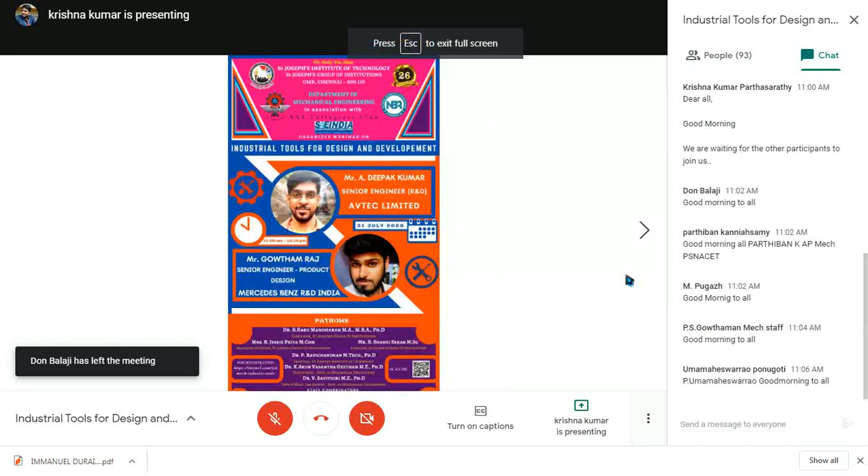Your continuous support makes us showcase a different set of intellectual webinars that can definitely serve the hunger of your brain. Our St. Joseph's Group of Institutions has amplified and grown in many folds over 25 years and successfully crossed a silver jubilee, and we are now into its 26th year.

I strongly believe growth is not only a vertical dimension, it is also a horizontal phenomenon. So when growth happens, inclusiveness must happen.

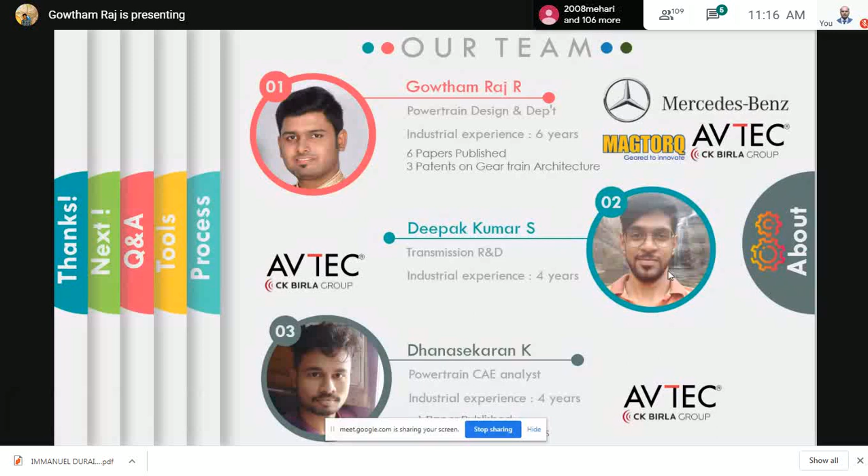Thank you, Deepak. So let's begin this agenda. Before I begin, let this webinar session be more of an interactive phase. Whenever you have any doubts at any phase of this webinar, please feel free to pause us at any point, and we will have a debate on that, and we can move forward.

Or else we will be having a separate Q&A session at the end of this presentation, and we can discuss there also. You can post questions over the chat also, and we will be taking those up at a later point. A few of the questions may not be answerable at this moment, but surely we'll be taking up those questions and reaching you in person.

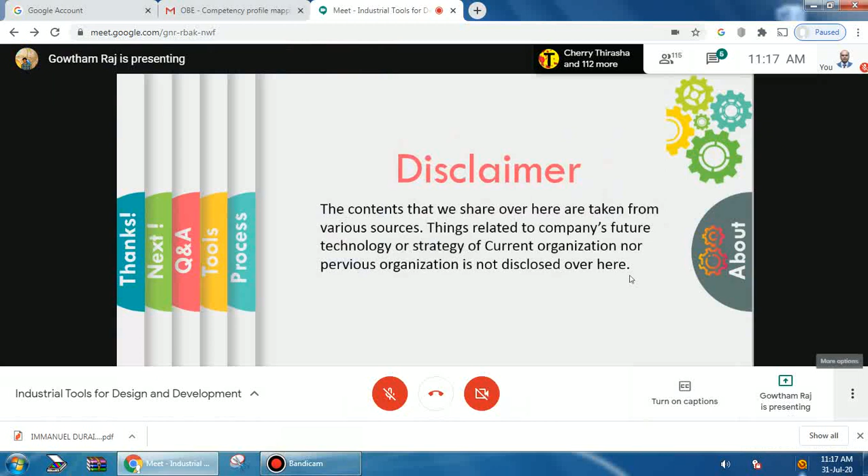About this disclaimer - the contents that we share over here are taken from various internet sources, and things related to our company's future, technology, or strategy of either our current organization or my previous organization are not disclosed here.

So we'll go to the vision of our team. We, the team Academic to Industry, are a group of young engineers under the umbrella of an experienced professional. Our aim is to help you, as a student, understand what is expected by the industry and give you a glimpse of what is happening in the industry.

In this regard, we would like to equip young engineers with the basic technological tools which we use on a day-to-day basis in most of our fields. Whether you want to pursue your career as a mechanical design engineer, a CAD engineer, a CAE engineer, or a production engineer, the industrial tools we discuss in the upcoming slides will be useful in one way or another.

The reason we started this Academic to Industry group is that when we joined as GETs in our organizations, we didn't know about these tools, while a few of my seniors who had that opportunity used it to succeed much faster than others. So we thought we would bring what is happening in the industry to the academic people. In simple words, we are trying to bridge the gap between industry expectations and young academic engineers' skills.

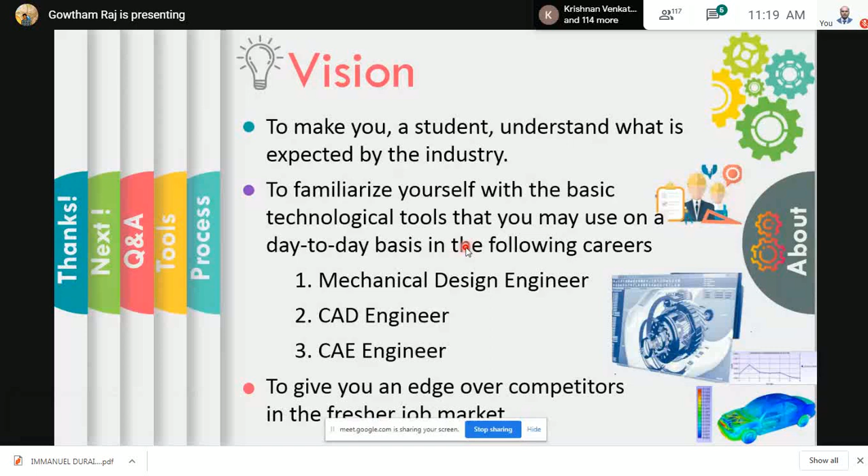We will move on to this topic. In this slide I will be explaining, or taking you through, what the industry expects, and as young academic engineers, what skills you should possess. Now let's take a look at this.

A person passing out of college will be having a bachelor's degree in the mechanical discipline, with or without specialization in automobile or production fields. The good thing is the practical and theoretical knowledge you possess over these four years - the strong theoretical background and the lab work - adds a plus point, provided you have done your final project on your own.

Nowadays most colleges are encouraging their students to participate in real-time events like Baja and Supra. I even saw the video where Mr. Krishna Kumar showed tractor events, and I was really surprised. These things make students realize that whatever they have learned in theory can be implemented in these practical sessions, and this adds a good portfolio for them.

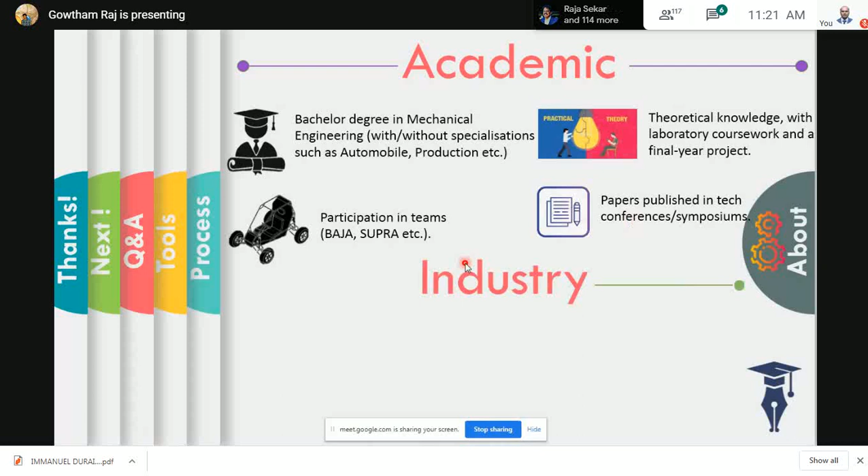Now let's look at what the industry is expecting from you guys. Whenever we talk about industry, the term 'industry ready engineer' is becoming more and more common. As an engineer, whenever you enter an organization, you will be in a GET role - Graduate Engineer Trainee.

Whenever we say industry ready engineer, the industry expects whoever joins as a GET to work on their day-to-day projects with minimal training. I remember my seniors from 2010 telling me that when they passed out of their curriculum, they used to have an exclusive one year of training as a GET, followed by six months of specific training in the departments they went into.

But now, because of industry changes, and because of time, money, and resource optimization factors, everything has changed. Now the person entering as a GET is expected by the industry to become part of the team within two or three months, with the basic tools that are used in the industry.

Last but not least, about strong basics - I have been part of R&D for the past 6 years, and whatever problems we face are all related to the basics of engineering, whether thermodynamics, strength of materials, or machine elements. These basics will always be helpful when you enter the industry.

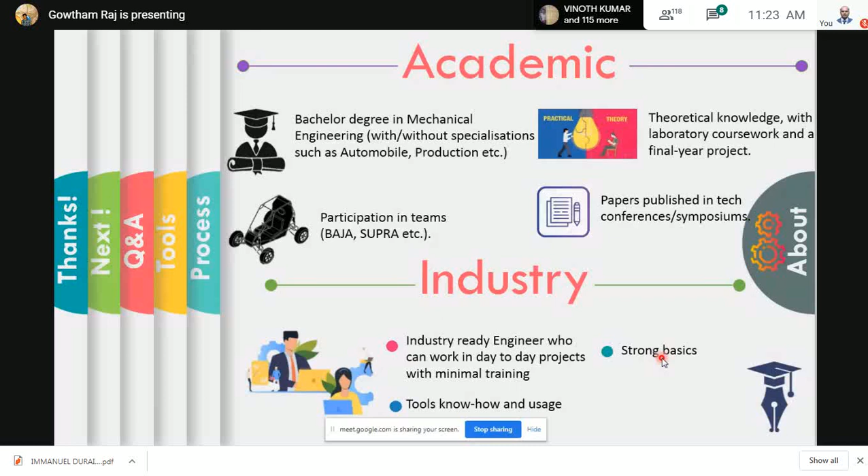Next I will take you through this product development cycle. This is what almost all industries follow, not pertaining to one industry but common across all of them, whether it's the energy sector, marine sector, windmill sector, or automobile. This product development cycle is one among the same, with some modifications pertaining to their own industries. Let's have a glimpse of this.

Everything starts with business planning. There is someone called a business analyst working in this business planning team. The role of the business analyst is to predict how the market is, how the scenarios will change down the line, 5 years, 10 years, or 20 years into the future.

This business analyst will come up with a proposal of how our product portfolio should be over time. I remember when I joined as an engineer in AVTEC Limited, one of the business analysts came with a proposal of electric powertrain for dump truck vehicles.

When I say dump truck vehicles, these are used in off-highway industries, not similar to what we see on normal roadways. Their payload, their load capacity, is more than 100 to 200 tons.

When the business analyst comes up with a proposal, he has a discussion with the product planning team. This team stays in touch with business planning and comes out with something called specifications, meaning whatever product we produce in the industry should meet some expectations.

Let's take the example of a truck. Whichever truck, based on its application, either in the mining industry or in on-highway vehicles, has its own specification. The truck in the mining industry will require more torque than one on normal highway roads.

In those conditions, they derive all the specifications of whether my truck has to carry so much load, with so much torque, and at so much speed. All these specifications are derived at this phase.

Once this is done, there is something called the business case team, made up of top-level managers sitting across and discussing cost benefits and the rate of returns that it will create for the industry, along with future plans for the next 5 to 10 years and what the revenues will be.

Once they feel everything is fine, they form separate teams across the organization, from the production team to the R&D team to the manufacturing team to the quality team. There will be a separate dedicated team working on these projects.

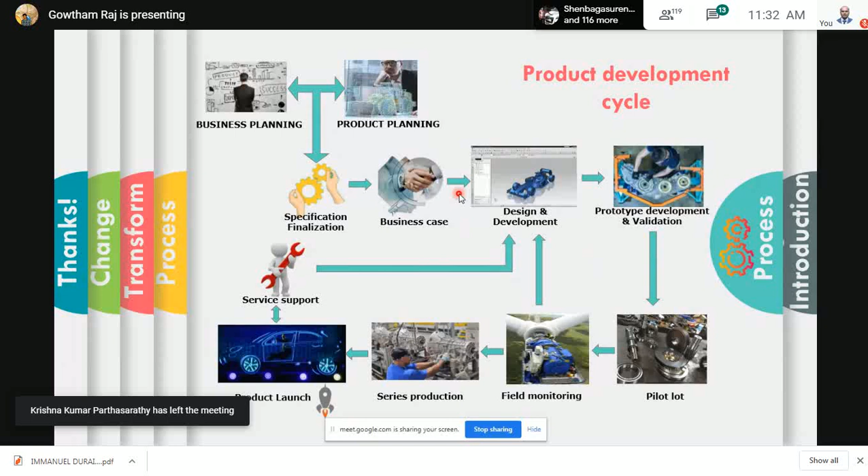Next, let's move on to the design and development cycle. The reason we have brought this design and development cycle exclusively here is that whenever you guys as a GET enter into any of the industries, you will be placed either in the design team, the development team, or the quality team.

Major of these teams are where you will be working, so it's highly necessary for you to understand what is happening in these teams. I have taken an automobile, a car, as an example, and described the various stages as they happen. As I mentioned in the last slide, from the business case, once the specifications are finalized, it moves to the research and development team, or the design and development team. Whenever the specifications are finalized and move to the R&D team, a separate team will be working on this particular cycle, right from concept layout.

Whenever I say it goes to the concept layout, there will be a parallel team working on the calculation base. Specifications come in two kinds: size parameters and functional parameters. There will be a separate team working on the size parameters of the car, and a separate team working on the calculation, whether it has to reach so much gradability or so much speed. All those things will be looked after by the calculation team.

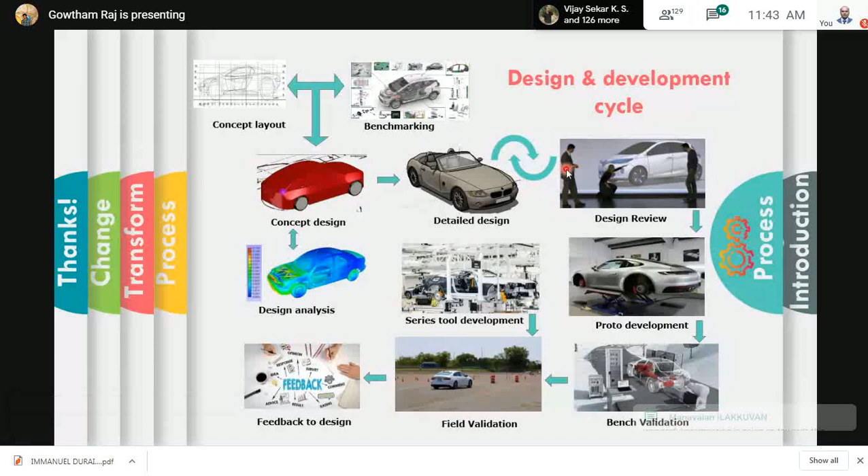So we will be seeing what are all the tools that are going to be used in these phases in the upcoming slides. As a basics, these are the five major tools that we use as design in powertrain-based industries: Romax, Nastran, KISSsoft, KISSsys, and NX-CAD.

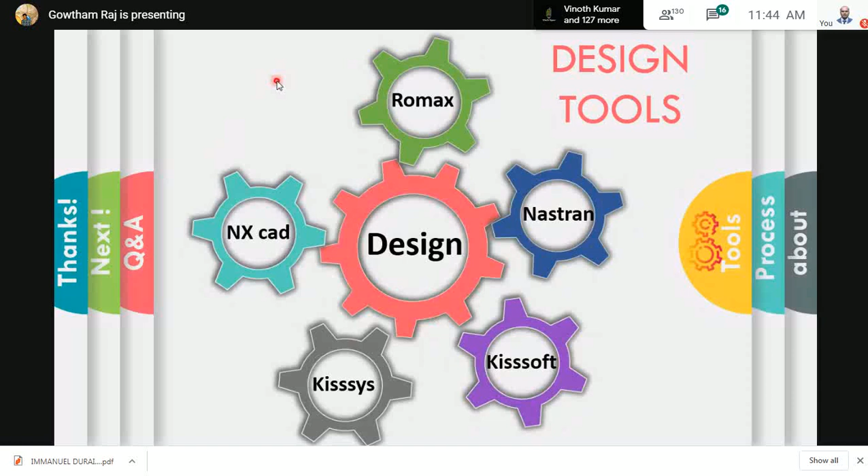And more or less, along with this, there are other two tools for hydraulic simulations: CFD and AMESim. We have not mentioned them here, but those tools are also part of these design activities. I will hand over this session to Deepak Kumar to explain these tools and give a brief introduction. Over to you, Deepak.

Thank you, Gautam. As all of you would have seen, Gautam gave us a brief insight on the design and development process and the product development process. So we will start with the first tool, which is KISSsys.

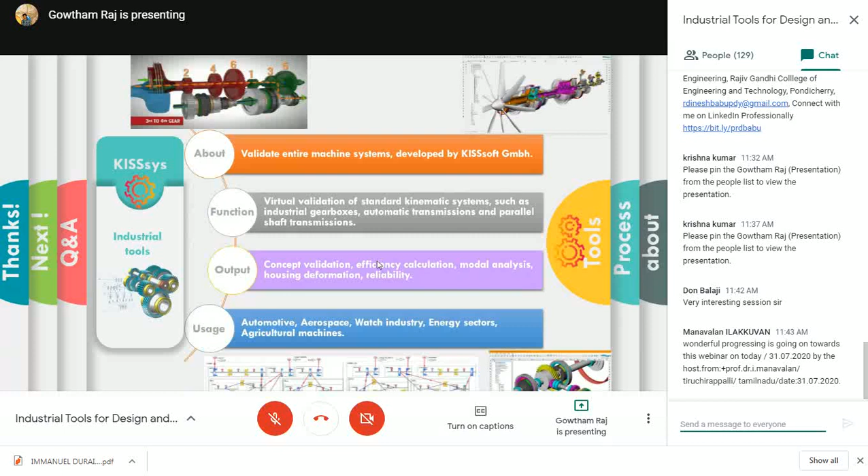KISSsys is, in layman terms, a system level analysis and design validation software. So how you start is you can model a kinematic system to simulate power flow and its behavior as a result of your boundary conditions.

So you can see the images on the bottom of the slide. There are three images. The first two depict a few blocks and connections in terms of lines. So when you start with KISSsys, you are presented with a blank canvas, and you can add your machine elements there.

In the first image at the bottom, you can see there are two blue blocks and two yellow blocks, and the same is repeated in each block within. These are connected by lines, which are otherwise called connections.

So what this typically means is, say you want to model a gearbox in KISSsys. If you see the first image on top, there's an animation - you take this example of two parallel shafts with a set of gears and their mating gears on both shafts. You just pull the component called bearing or a component called gear and place it on the canvas in a straight line, and define a single shaft and the other shaft.

Then you connect each other - for example, you connect gear number 2 to the mating gear down there, and gear number 4 to the mating gear and vice versa. Once you do this, you then give boundary conditions.

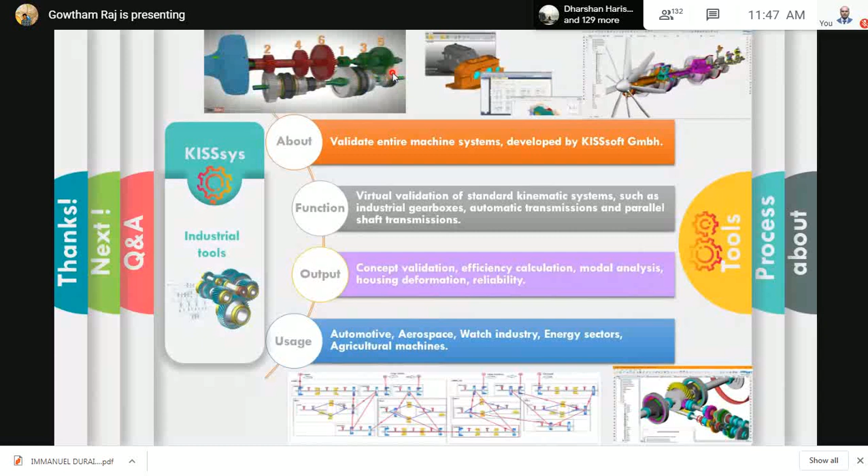This repeats for the next ranges. However, as you go up, you want more speed but less torque. So for each range you can give your boundary conditions and then determine what will be the output from the output shaft. This you can model as a system in KISSsys.

One good advantage with KISSsys is it can interface with something called KISSsoft.

So, which you'll see in the next slide. So KISSsoft is generally used for designing machine elements.

If you want to design a gear in your KISSsys simulation, you put a block called gear and seamlessly go to KISSsoft, design the gear there, then get back to KISSsys and continue with your simulation. If you otherwise have a hand calculation, you would probably have to input everything manually into KISSsys and then verify. But since both are interfaced, it is very seamless and the overall time is reduced.

This software is typically used in industries such as automotive, aerospace, watch industries, energy sectors, and agricultural machines. So basically, wherever machine elements are required, there you use KISS.

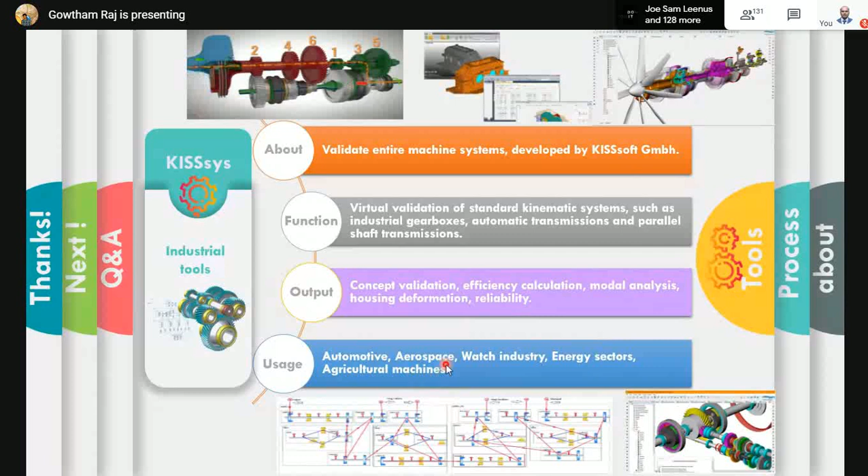Next slide, please. So this is KISSsoft. KISSsoft is used to design machine elements. Machine elements can be gears, shafts, bearings, splines, joints, and the other things which you see on the screen.

So it is like a formula-filled Excel sheet, but it has a graphical interface in the front. In the background, formulae and design factors considered in international standards such as ISO, DIN, and AGMA are incorporated. So whenever you run your calculations, rest assured that it is running on international standards from all over the world. This KISSsoft is owned by a company called Gleason Corporation.

Those of you familiar with gears might know that Gleason is the market leader in gear manufacturing. In KISSsoft, to give you a better example, I would take a gear pair.

So you start off with something called rough sizing. The rough sizing is where you give the general sizes of the gear, say its outer diameter and inner diameter, the face width, the width of the gear, and then you go to fine sizing.

Fine sizing is where you have probably verified the rough sized gear in KISSsys, so your design requirements are being met. Then you come to fine sizing, where you finalize your design, you refine it. So you give values such as the tolerances for the gears, the surface finishes, and the corrections for lead or geometry.

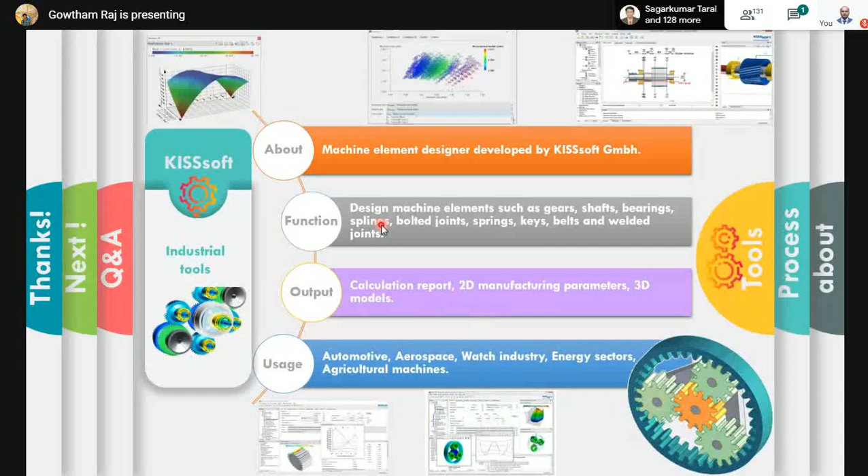That will be pretty good in the KISSsoft environment. Yeah, Deepak, over to you.

As Gautam rightly said, we could have a good idea as to how KISSsoft and KISSsys aid in the design process. The main intention is to reduce time and reduce errors, because as a human being you're always prone to errors, but software will typically run without any errors. So that's what the advantages are.

So next will be NX CAD. As the name suggests, NX is a CAD tool. It is used to visualize your designs, refine them, and convert them to a manufactured product. I would not go into detail as to what a CAD tool is, but I would want to say how NX is differentiated from the other players in the industry. The first reason is it has a model based approach.

In other tools, you would probably start with a sketch, go directly into drafting, and give the front view, left side view, right side view, and end with the manufacturer drawing. There, a layman would not be able to visualize the product to have a better idea as to how it fits your design requirement.

But with NX, you start with a model. You make a 3D model, then based on the 3D model, you draft. So your model and drawing are always connected. Even if you want to change your part, you first do it in the model. You can't directly change the drawing. You change the part, modify your 3D model, and since both are connected, it automatically updates in the drawing.

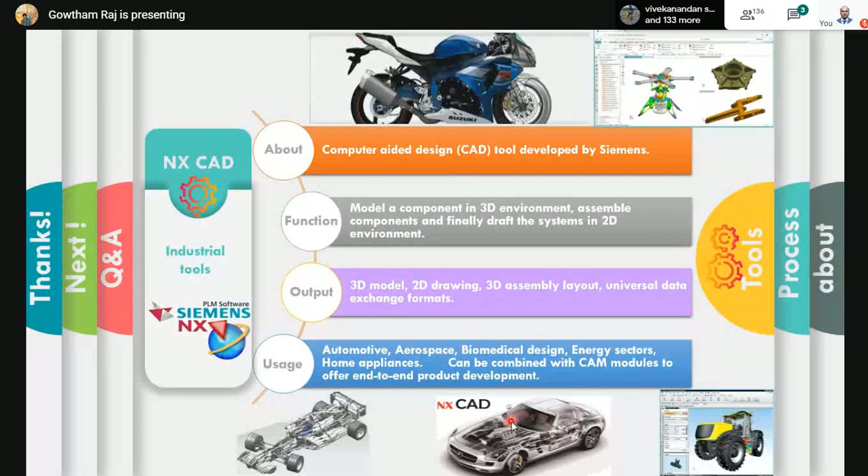So the next probably would be NX Nastran. NX Nastran is another one of those FEA tools available in the market. Again, I would not go into detail about what an FEA tool is. I would just want to say how it is different from the others in the field.

I would like to show the advantage of using Nastran over others in the form of a real life scenario which happened in Avtech. We had to design a gearbox for the yawing of a wind turbine. Many people would have seen a wind turbine, very famous in the southern part of Tamil Nadu, particularly in Nagarkoil and districts surrounding it.

If you have seen, there will be a long stem on which the turbine will be mounted. The blades rotate when the wind hits them at a specific angle. Letting apart the aerodynamic aspect of it, the wind direction changes - it's not constant, it changes as the weather changes. So you would want the turbine to automatically rotate to match the wind direction, so that you get maximum output out of it.

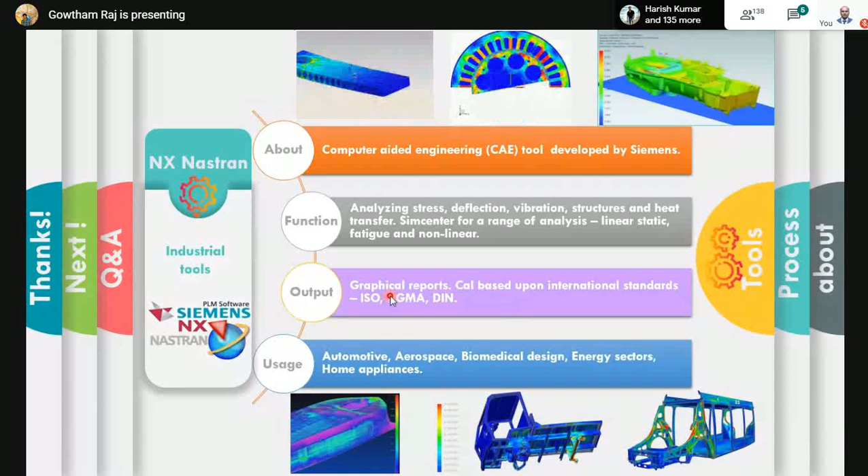We started with the concept in NX CAD, and when we wanted to validate in NX Nastran, there is a defining feature of Nastran and NX in terms of FEA. When you bring the model into NX Nastran, you would want to mesh the components first.

Once you mesh it, you will probably face some difficulties as to where the mesh is not correctly connected. So you would want to modify the part so that meshing can be accommodated.

Here, Nastran, since it's part of NX, you can, without switching back to another software, within Nastran, get back to NX CAD, make the changes, and come back to Nastran. Once you do the change, in Nastran it's just a click of the mouse to update the part.

I'll give another example: if you use ANSYS and SolidWorks, you would want to find corrections in ANSYS, do it in SolidWorks, get it back to ANSYS, mesh it again, and then validate. But in Nastran, steps 2, 3, and 4 are avoided. You just go to NX within Nastran, change the parameters, get back to Nastran, click, and your model gets updated, and the mesh also gets accommodated.

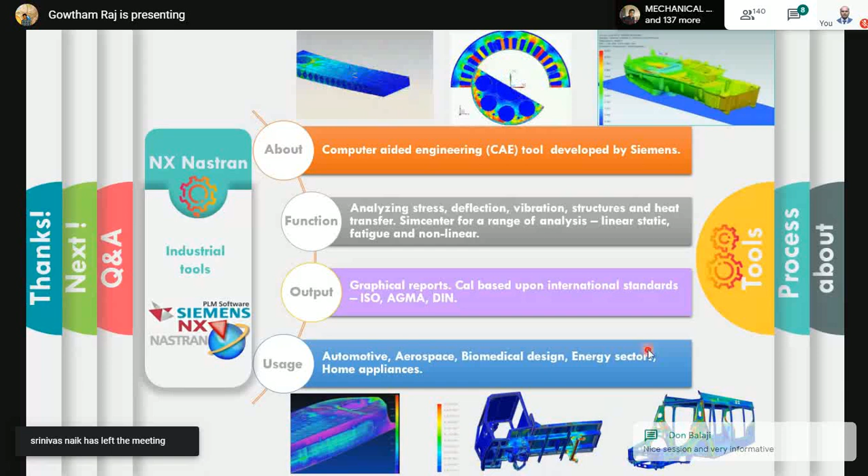This saves a lot of time, and we saved almost 4 to 5 months by using this, because we had a lot of iterations. It took us about 2 to 3 months just to arrive at the manufacturable design. So you can see how time-saving Nastran and NX were in this regard.

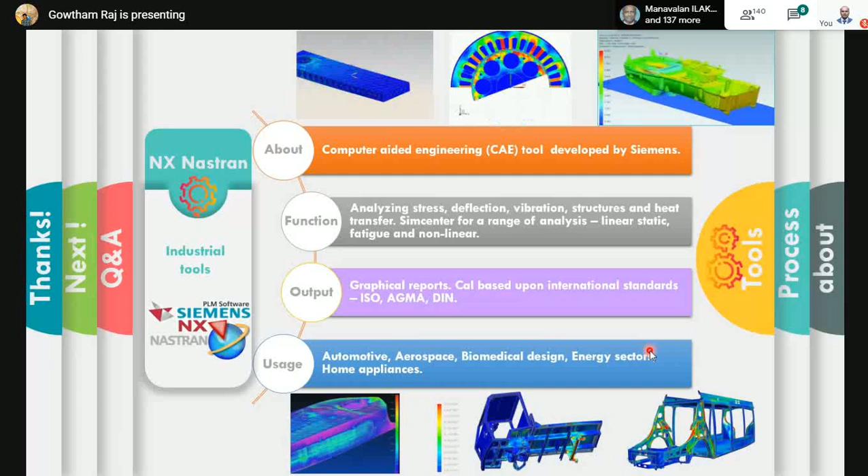That is the best explanation I can give for Nastran. Usage will be in applications where NX is used, such as automotive, aerospace, biomedical design, energy sector, and home appliances. So over to the next software.

Romax. Romax is again an umbrella of software capabilities which comes under Hexagon's Manufacturing Intelligence Division. Romax is based out of the United Kingdom, specifically Nottingham. In Romax, the capabilities are similar to KISSsoft and KISSsys.

You can make a concept layout of your design in Romax Concept, which is one of its modules. How Romax works is it has an umbrella, and under the umbrella you'll have different modules: a module for concept generation, a module for designing your component, a module to validate your component, and a module to do NVH and even flow analysis.

In Concept, you model your components, and once you have a set of boundary conditions, you take it to Romax Designer. In Romax Designer, you work with the detailing of the part. Once that is done, you can validate the part within Designer, and once you are satisfied with the design constraints, you can also do NVH validation.

I'll give a brief overview of NVH, because we personally haven't worked with NVH, since in Aptech we didn't have a requirement till now. Maybe going ahead, we can see how NVH can be accommodated also.

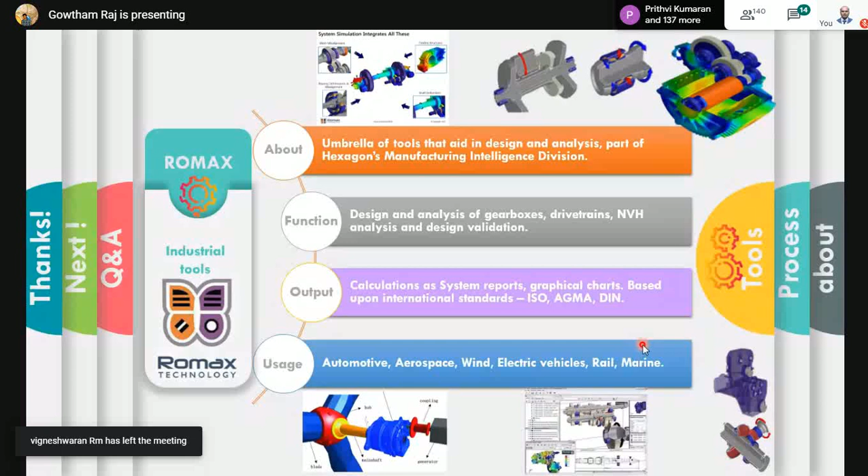For the capability of Romax, I would again take the example of the yawing gearbox. Once we validated the design in NX, we had to validate it in a module called Romax Wind. This was a requirement from our end customer. Romax Wind was new to us because it was the first time we stepped into the wind industry.

So we went to Romax for our solution. Romax also gives a design consultancy service. They give design reviews - they won't actually help you with the design, but they will tell you how it is not meeting your requirement.

Once we took it to Romax Wind, we were relieved to see our design was validated in the first try. So NX CAD and NX Nastran helped us in validating the components, whereas Romax Wind helped us in validating the complete system with respect to the wind perspective.

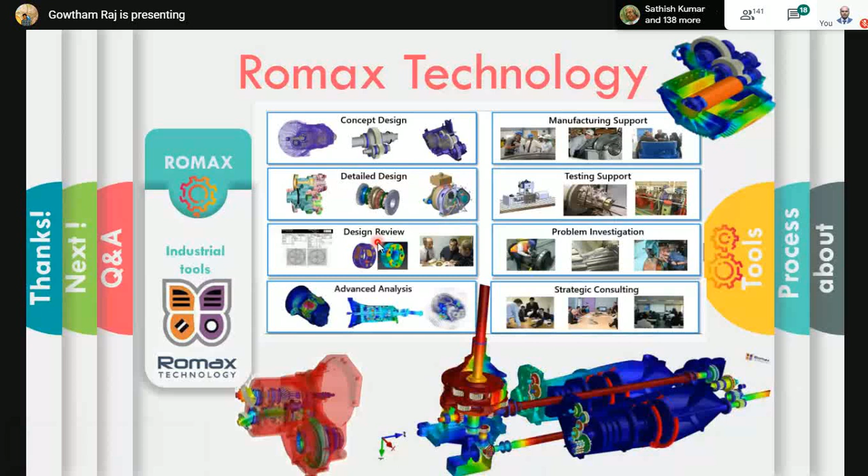Apart from design verification, they also provide services such as manufacturing support, testing support, and after your product is out in the market, they can give problem investigations for special cases. They also do strategic consulting. So Romax, as you can see, has a big umbrella of modules. It is a relatively new member to the industry, but...